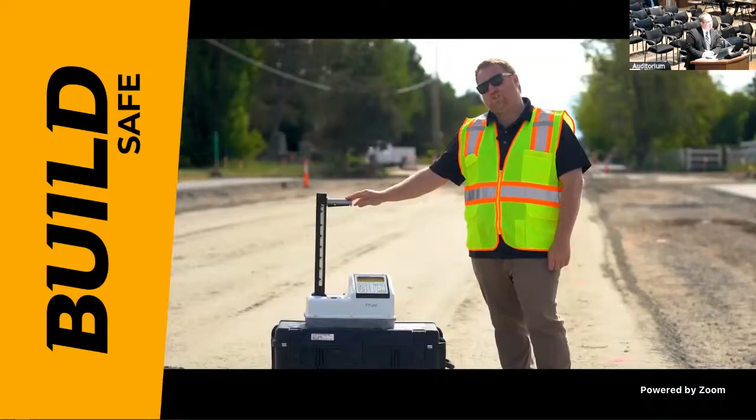Have you ever wondered how ACHD knows when a road's compacted? Well, in today's episode of What Is It Wednesday, we're going to be talking about that. I am Matthew with ACHD. I'm a project inspector, and today we're going to talk about one of the methods with our nuclear densometer. This device actually tests compaction of soils, asphalt, concrete. It has a little tiny bit of cesium-137 in there, and will actually shoot out a little bit of gamma radiation. And the radiation coming back to the sensor on this thing will actually tell us how compacted material actually is.

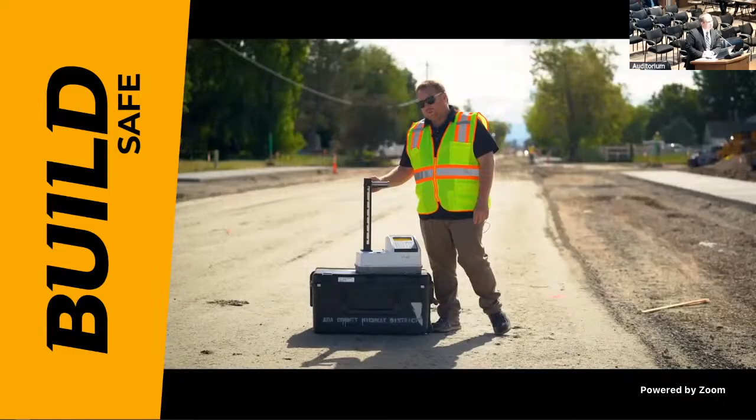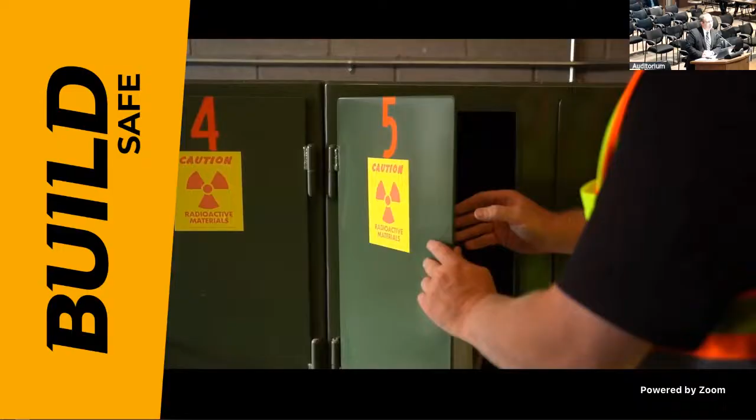So our gauge here has what we call our source rod. This little handle will actually advance down all the way up to 12 inches. At the tip of the source rod, that's where our cesium-137 is. It's a very small amount, but with our gauge, we can electrify that cesium-137. It'll actually shoot out that gamma radiation, and there's a sensor on the other side of the gauge that will pick it up and tell us how compacted the surface is.

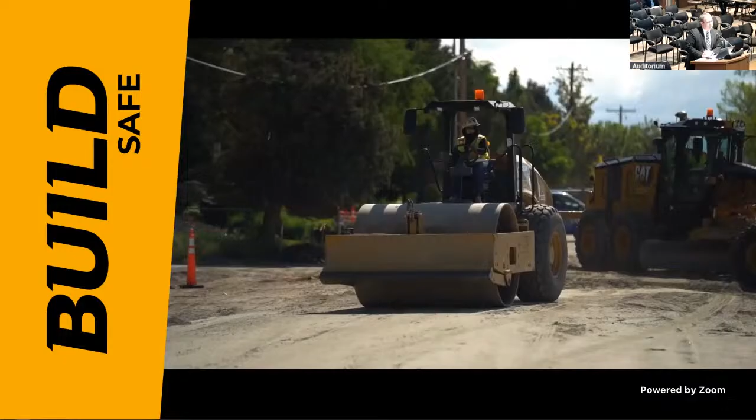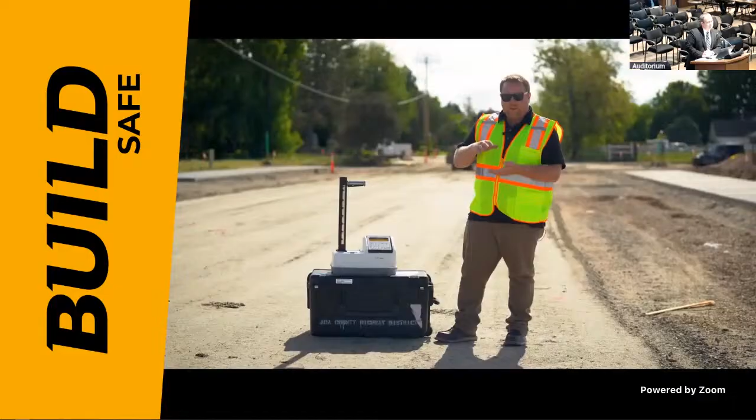When we're building a road, we don't just put a bunch of gravels out, pave on top of it, and then have you guys drive on it. We actually have to build it in layers like a cake. And so we put a little bit of gravel down, we test it with our densometer here, make sure it's compacted enough for the next layer, and we'll do that so on and so forth until we get to the asphalt layer. Then we'll take our densometer out, test the asphalt, what's below the asphalt, make sure it's compacted enough and safe enough for the public use.

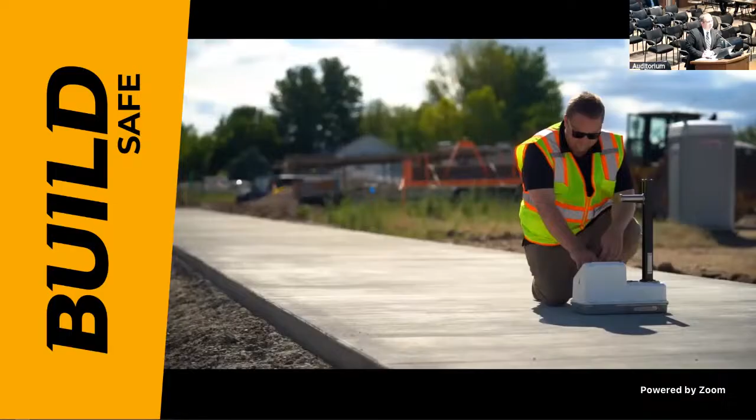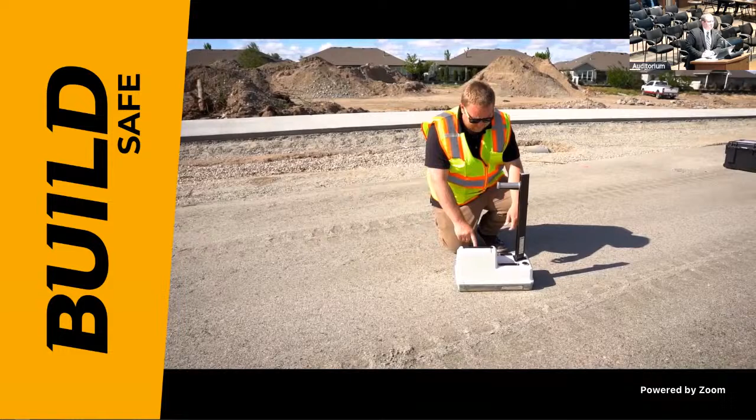We'll test sidewalks. When a contractor comes out or somebody comes out and digs a trench to put sewer in, we'll test the trench as well. Everything that's done in our right-of-way. Thanks to this gauge and other testing methods, ACHD is always making sure that the roads are compacted and safe. And that's it for your What Is It Wednesday.

And I wanted to share this with you because it's a great example of the efforts that are being made by our communications team, as well as all of our team members, to really educate the public about what is it that we actually do and how do we make sure the investments that are made last and are useful for the public for a very long time. Just grateful for Matt and his good way of explaining that. Just another example of how we can use this.

We're looking at how can we do a What Is It Wednesday about vehicle registration fees as we come up on what will be a campaign, but how do we educate the public on what those are used for and how we are investing the dollars that they give us and making it useful long-term. So I think that's a great example of the good work our communications team is doing to really get the message out there to the public.

Wanted to share with you that this wonderful project out in Star on Floating Feather is coming to a close. This has been a project many years in the making. I remember watching it as part of the integrated 5-year work plan. One of the things, and why this is a good example here, is the neighborhoods that built in and around that contributed to a road trust.

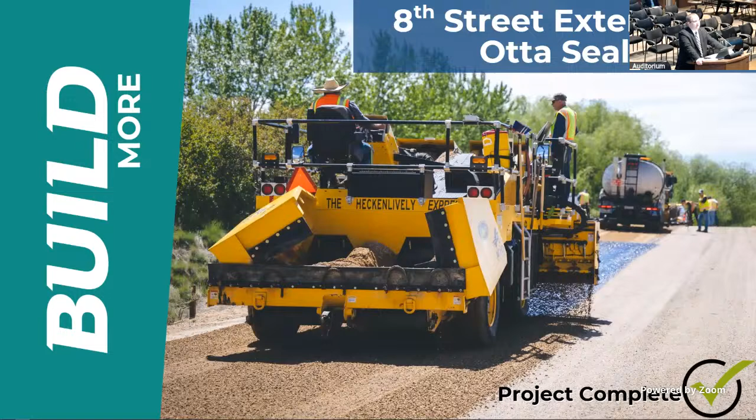We also are excited to announce the end of our 8th Street Extension Otta Seal project. This has been a project that has been a concern for the public for quite some time in terms of the dust that was coming up on that road, the amount of maintenance that we were required to continually do there. And we're excited about the type of work that we were able to do.

The Otta Seal is really just a thicker seal. It uses larger rocks, and in lieu of what we typically do with a chip seal, where we put down the oil, put down the rock, and then do a seal on top of it, we're able to leave it looking more natural in that environment, as that road has been dirt for quite some time, but it will hold together a lot better long term.

But this was a good start for our chip seal program, as we were able to get the crews mobilized and testing this out and complete this important project at the same time.

It is National Public Works Week, and we join with our fellow partners at the cities and other utilities to support and thank our teams for the work that they do to ensure that everyone's able to move around safely, that we have the needed utilities. It's not been that long since we didn't always have these kinds of things, and we take for granted that power comes to our house and water flows from our sinks and all of the other fun things that come through public works.

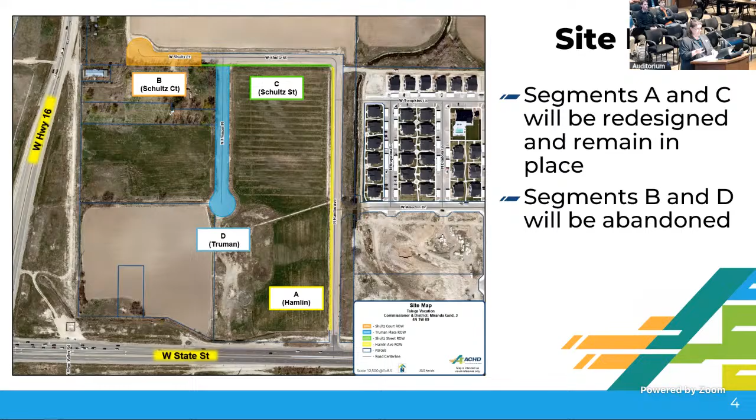Okay, so this is a representation of the development that the applicant is proposing. The city of Eagle has identified the need for more affordable housing options in order to allow their citizens the ability to both work and live in the city, and this development project helps to meet that demand. And the applicant's also going to provide access to the adjacent landlocked parcel. You can see up there in the top northwest corner, highlighted in red. Originally, that access for that parcel was off of Highway 16, but the Idaho Transportation Department bought that out, landlocking that parcel once upon a time.

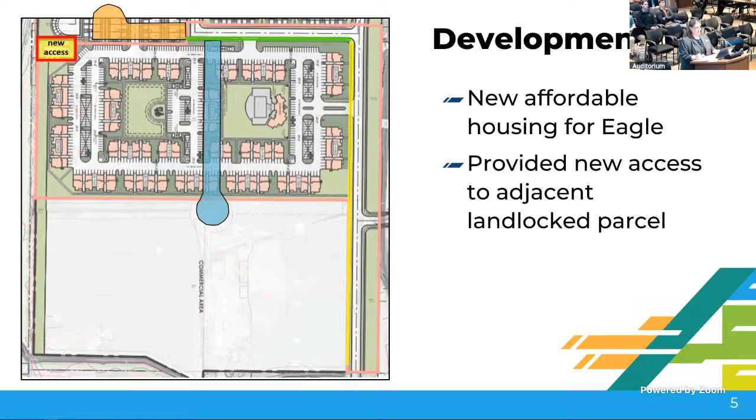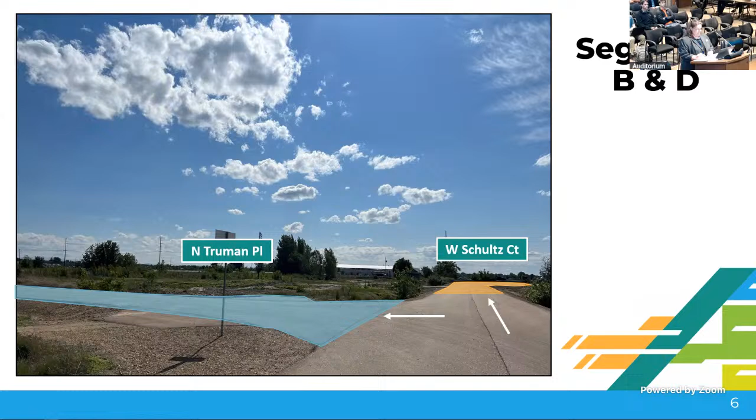So, then, here you can see an overlay of the vacated segments just to kind of give you a visual of the proposed changes. And this is a picture of the site today showing segment B, Schultz Court, there in orange, and D, Truman Place, kind of highlighted in blue, where they're going to be vacated to make way for that development.

Madam President, Commissioner McKinney? Carrie, just to clarify, it appears from all the information that these right-of-way segments are currently paved. And so the property owner will be tearing those all up and so on, I presume, for the most part. Is that correct? Are they all currently paved? Yeah, Madam President, Commissioners, they are all currently paved. Okay, all right. That's all. Thank you. Okay. All right, thanks, Carrie. If the applicant is here, invite you up to go ahead and speak on this.

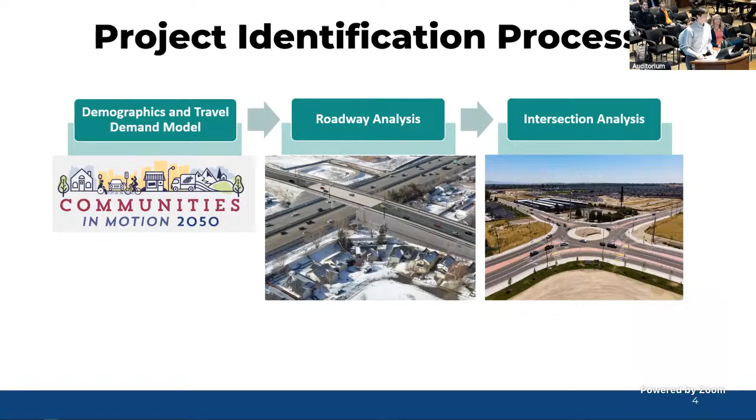So now I'll talk a little bit about some of the demographic data that went into this process. So the primary underlying assumption that really drives this analysis is the regionally adopted future demographics that are built into this model. So these demographics are developed by Compass based on close collaboration and input from land use agencies, approved and anticipated development, and historical growth trends. And these are adopted regionally as part of Communities in Motion 2050.

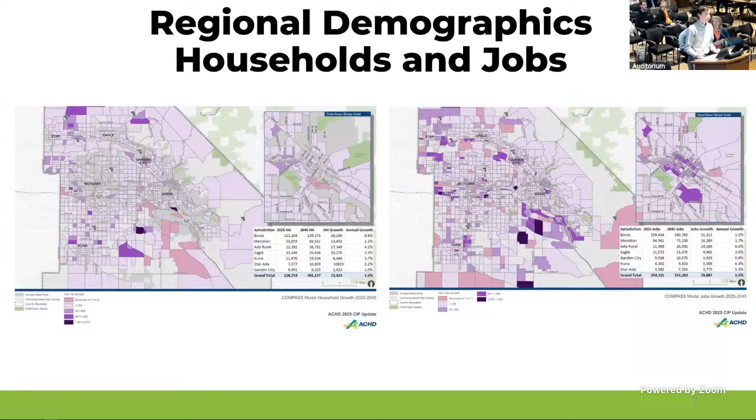So at a high level, the assumed growth within Ada County is about 31% for both households and jobs in the next 20 years. And that equates to an annual growth percentage of about 1.6% per year. The map on your left on the screen shows the growth in households, and the map on the right shows the growth in jobs per individual zone, with the darker purple indicating higher levels of growth. And I know this is hard to see, and I believe these figures were also included in the packet that was provided to you. I won't spend too much time here, but just wanted to provide just a quick snapshot of the growth forecasts used in this project identification process.

So this information was presented to the CICAC, and they accepted the use of this demographic data for the 2025 CIP update, and it was subsequently used for this analysis. I also want to note that the use of Compass's regionally adopted demographics is consistent with the approach taken in previous ACHD CIP updates. So with that, we'll jump into our discussion on projects.

So before we got into the actual project list, we wanted to provide just a couple more notes on the actual process that was used to identify these projects. So we have a 20-year horizon. So the process really identified growth-related capacity needs on both roadways and intersections from 2025 to 2045. We started this process by identifying existing deficiencies or roadways that already exceed ACHD's planning thresholds under year 2025 conditions. And as per Idaho code, these projects are not eligible for traffic impact fee funding.

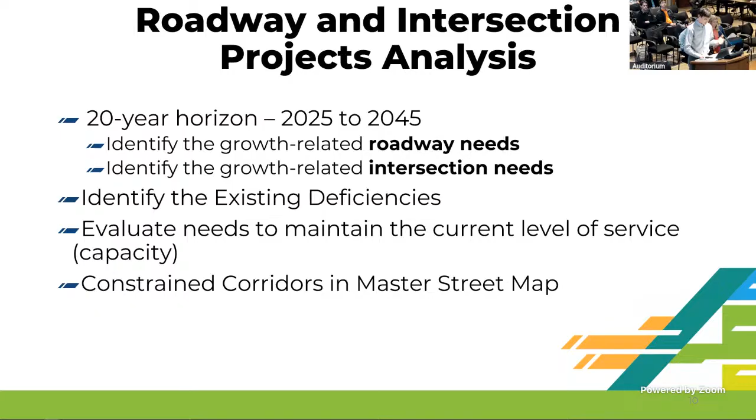We then evaluated what capacity projects would be needed to maintain the current levels of service and meet ACHD's planning thresholds with the addition of development over the next 20 years. And then throughout this process, we referred to ACHD's master street map, which identifies the planned or maximum allowable widening for each ACHD arterial. So without any further ado, we'll get to the actual projects.

One important note I'd like to make at this point is that the roadway projects shown here and the intersection projects shown on the next slide really show the full list of capacity improvements that are needed to meet ACHD's planning thresholds as growth occurs over the next 20 years. And with the exception of existing deficiencies, these maps represent the list of potential projects that could be included in the CIP as impact fee eligible. This is not the final project list, and it will be further screened, and projects will be modified as we move forward based on input from the CICAC, Commission, and through working with ACHD staff.

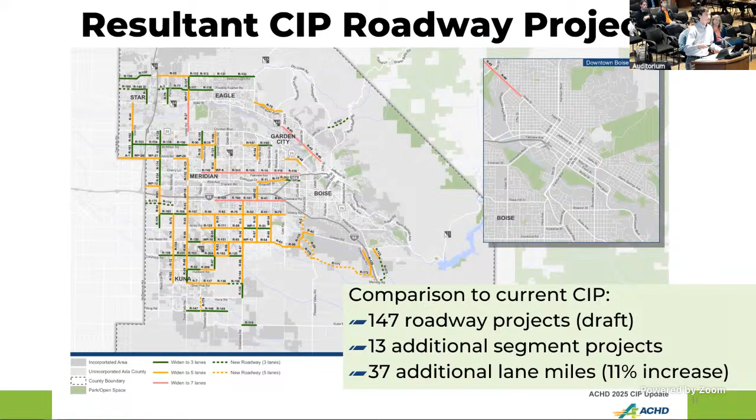So this slide shows the intersection projects. Previous slide was roadway. This one is really just focused on intersections that were identified as part of this analysis process. The purple dots indicate traffic signals, while green dots indicate roundabouts. Some of these projects call for brand new traffic signals or roundabouts, and some really just call for minor modifications to existing roundabouts or traffic signals. An example of one of those modifications would be the addition of a dedicated left turn lane at an existing traffic signal.

So not all of these are full, brand new traffic signals or brand new roundabouts. In total, we have identified 122 intersection projects, and this is an increase of 26 projects from the previous CIP, or about a 27% increase.

Madam President. Commissioner McKinney. Mark, let me just ask you a question, because I get this question from residents a lot, asking about roundabouts. And I tell them, we're going to build a lot more. We've got a lot more in the pipeline. And I'm just curious to know, and maybe Justin's the one to answer this. I think at the moment we have something like 8 roundabouts in Ada County, or is it more than that?

More than that? Okay. And I'm interested to know how many are currently in the pipeline in addition to how many are here. So Mark, you can probably tell me, how many roundabout projects do we have on this? We have 122 total, without counting. I suppose we could count them, but it looks like about half and half. Is that about right? We're probably looking at about 50 or so roundabout projects on this. Yeah, President Gold, Commissioner McKinney, I don't know that number off the top of my head, but I would guess about a 50-50 split. Okay.

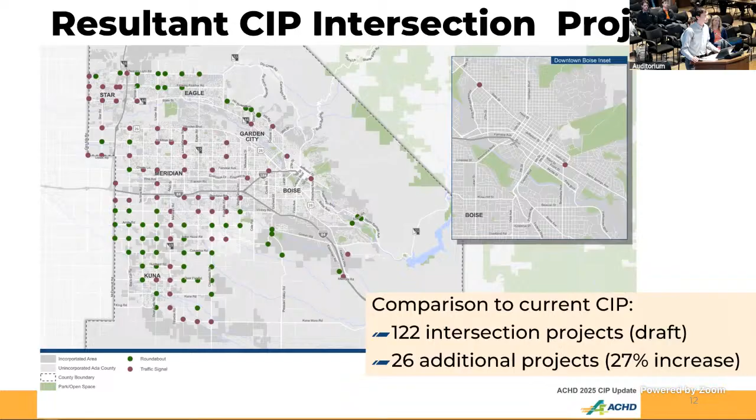Okay. So moving forward, this slide shows a comparison between the updated project list and the currently adopted CIP. And there's a lot going on in this figure. I believe it's also included in your packet, so I'll take a minute to walk through what we're looking at.

So on the roadway project side, the orange lines represent new roadway projects that were identified through this 2025 CIP process and are not included in the currently adopted CIP. And you'll notice that these are largely centered in Kuna, South Meridian, Star and Eagle, and then a couple within the city of Boise. The blue lines represent roadways that were in the previous CIP, but now have updated widening assumptions. And I'll walk through a couple examples to illustrate why we're seeing some of these changes.

So some of these changes are due to different anticipated future traffic patterns. And I'll use Black Cat from Franklin to Chinden as an example. So the currently adopted CIP shows projects on Black Cat from Franklin to Chinden that widen to 5 lanes and are fully impact fee eligible. That traffic analysis and modeling completed in 2020 did not assume full build out of State Highway 16 in future years. In this CIP update, we did assume full build out of a grade separated State Highway 16 by year 2045.

And with that parallel capacity improvement to Black Cat included in our future scenarios, we are seeing less future demand on the Black Cat Road corridor, and only show the need to widen to 3 lanes by 2045 to meet ACHD planning thresholds. That's not to say that the ultimate project at that location would necessarily be 3 lanes. It could still be 5 lanes, but only widening to 3 lanes would be impact fee eligible. And these are some of the intricacies that we'll be screening with staff over the next couple months as we refine this project list.

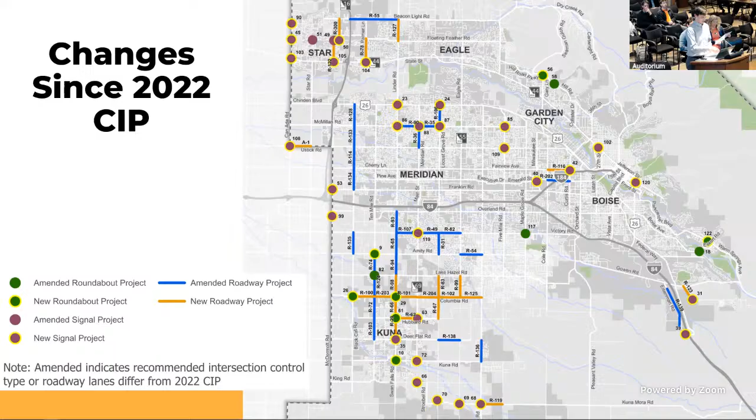Okay. One more item I'd like to highlight is existing deficiencies. Existing deficiencies are defined as locations that do not meet ACHD's planning thresholds under year 2025 conditions. The Idaho Impact Fee Act specifies that impact fees may not fund projects that are existing deficiencies and that CIPs need to identify these locations.

The projects identified on this map highlight these locations, and portions of these projects will not be eligible for funding via impact fees. And this includes the 26 roadway segments and 6 intersections shown on this map. Just wanted to highlight this component of our process as it is an important part of confirming that ACHD is meeting Idaho code, and it will affect our impact fee calculations.

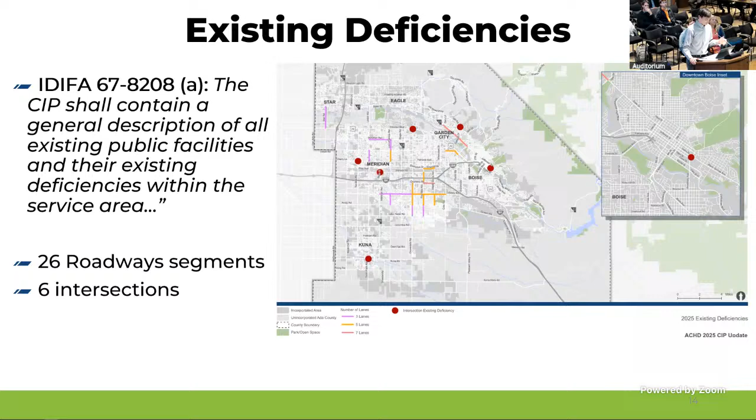So one more slide for you today. Really, the key next step in our process is developing cost estimates for each project, assessing impact fee eligibility for each project, and then using that to calculate the total impact fee eligible costs of all projects. And really, that total impact fee eligible cost number will be used directly in our impact fee calculations, as Justin alluded to.

As a reminder to the commission, and as you discussed, the CIP project costs have not been updated since 2020, over 5 years ago. And as you are all well aware, there have been significant increases in construction costs over that time period, and this will affect the resulting traffic impact fees. We will come back to the commission in June, and our plan is to focus our conversation on the project cost estimates and resulting traffic impact fees, as well as further refinements to this project list.

We will also revisit scenarios on service areas, so aiming to tie up some of the loose ends from our conversations on best practices. In addition to this touch point with you in June, we plan to have an additional 2 to 3 work sessions with the commission between now and adoption to work through these final items and get this project to the finish line. Ultimately, our goal is to have the CIP and TIF schedule adopted by the commission by November 2025. And with that, I'll stand for questions.

Commissioner Pickering. Thanks, Madam President. Mark, on the public input, could you put the timeline back on there really quick? Thank you. The public comment period, how long are you anticipating that to be again? President Gold, Commissioner Pickering, I believe we have 30 days. And it should start, I believe, in late September, going through most of October.